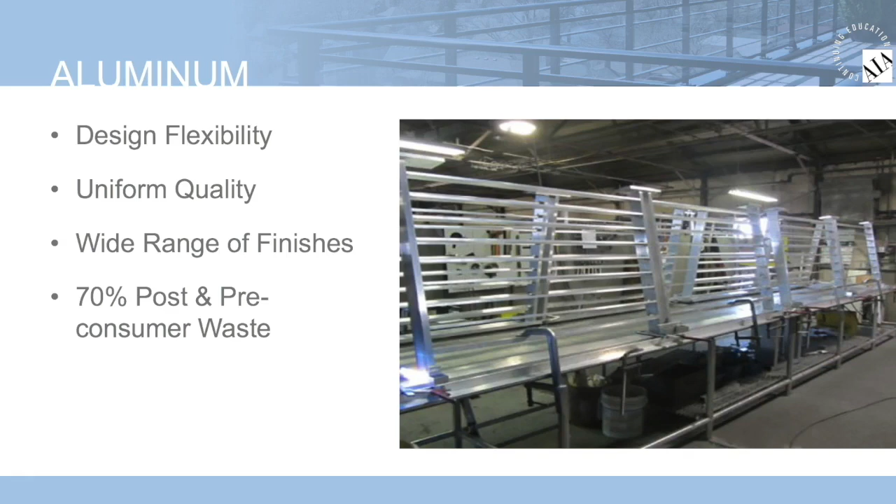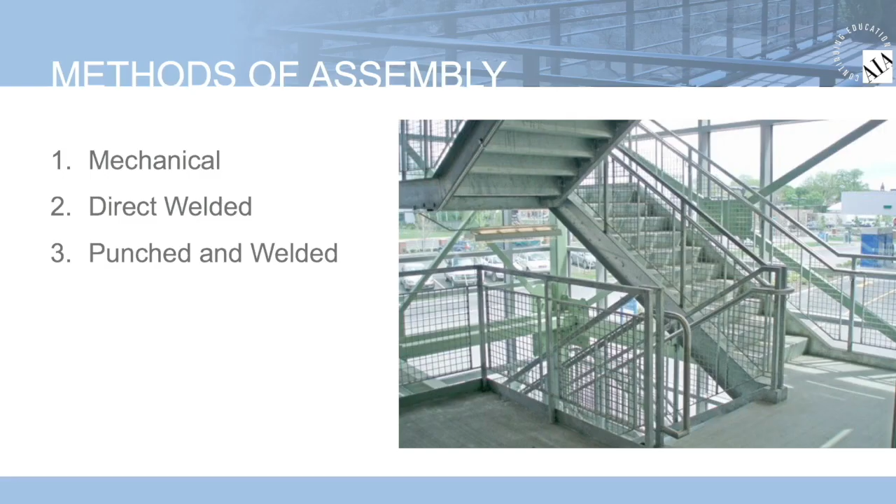There are three basic types of aluminum railing system methods of assembly: mechanical, direct welded, and punch-and welded. Mechanical, as the name implies, is a railing system that is mechanically fastened and held together with screws, rivets, or epoxy. The system may initially seem low cost, but there are many potential issues that can contribute to low quality, product longevity, and total cost.

There is a higher cost of labor due to field fabrication cost. Mechanical fasteners have a tendency to loosen and the railing system can become unsafe over time. The quality of the product is only as good as the mechanic who field fabricated all the parts that were assembled. The system can rattle if not assembled properly. The system is only as strong as each individual post. The safety factor is only as good as the field fabricator explicitly following all installation instructions. Cut ends of components open up the paint surface where filiform corrosion can originate, thus compromising the finish.

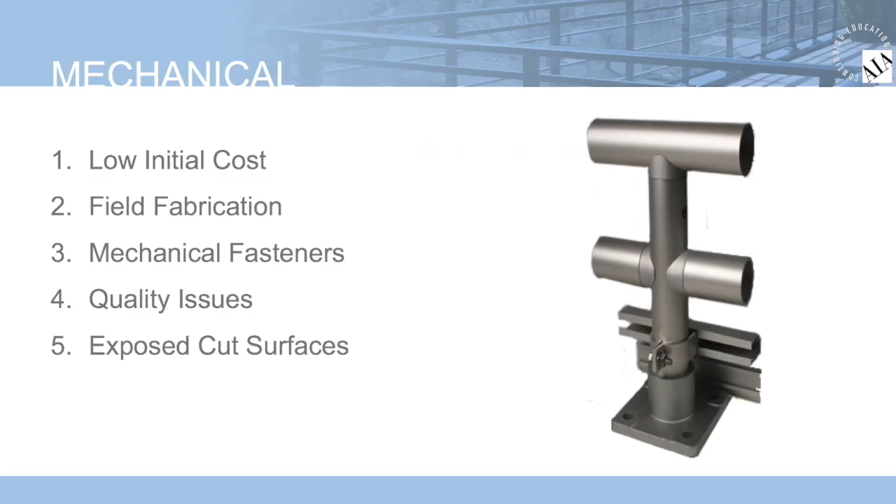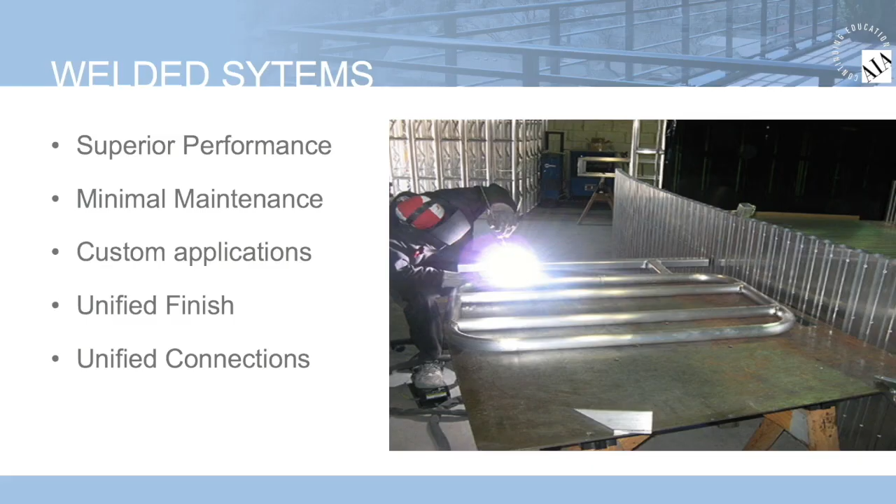In general, welded systems offer superior performance over mechanical systems, providing minimal maintenance and allowing for custom designs with a factory finish and unified construction. Whether it's a direct welded system or punch-and-welded system, there are distinct advantages with direct welding, including lower installation labor cost, typically half the installation time, providing a big cost savings.

Welded systems provide high strength to the overall systems, as all connections are welded, which is much stronger than mechanical connections. The only mechanical fasteners used are to bolt the system to the building and stainless fasteners at all splice locations. The welded unitized system transfers design loads throughout the railing to adjacent post attachments.

Lastly, with welded systems you get the highest level of quality control, as all systems are fabricated in the factory under a controlled environment. There are no exposed ends of aluminum, as all are fully powder coated in the factory.

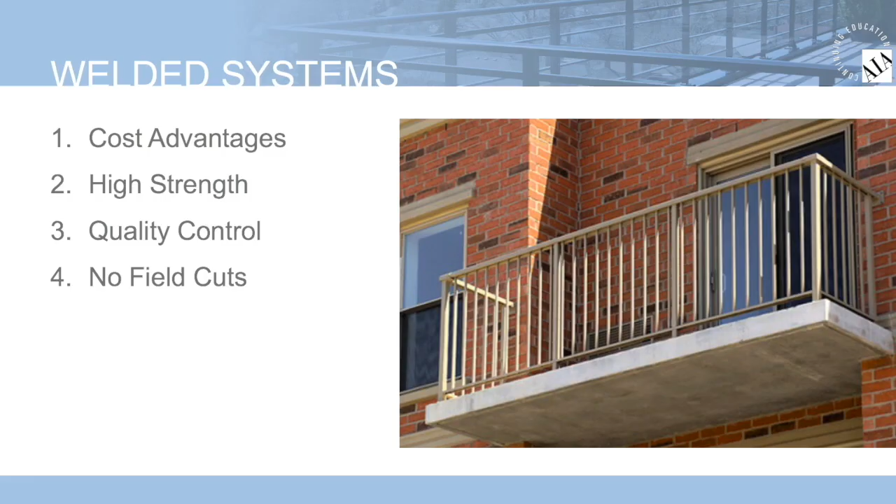Welded railing systems are typically the mark of a premium high-end system. Direct welded systems provide strong, high-strength joints. When fabricated in a controlled environment, it offers superior quality control. Direct welds also allow for highly customized designs with the ability to offer the desired performance of the system.

As railings are a life safety device, it should be noted that welding must meet the proper strength specifications for aluminum structures. This is another area where a reputable manufacturer should be specified for the fabrication of welded railing systems.

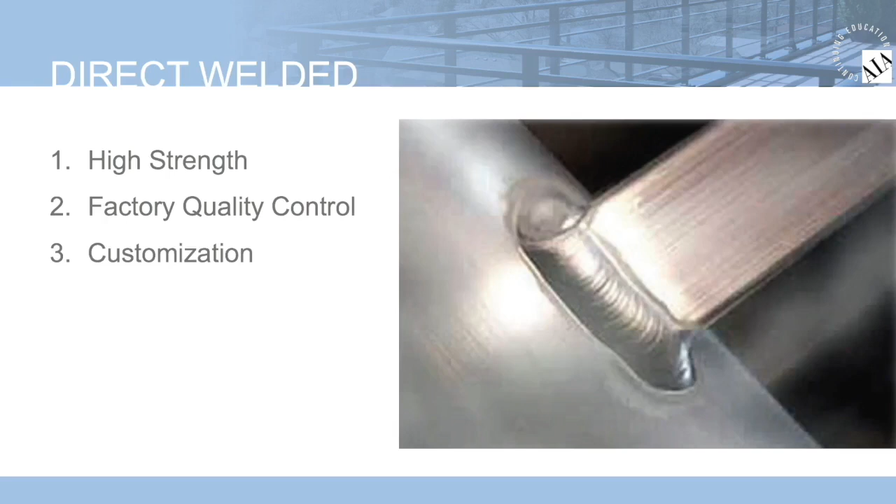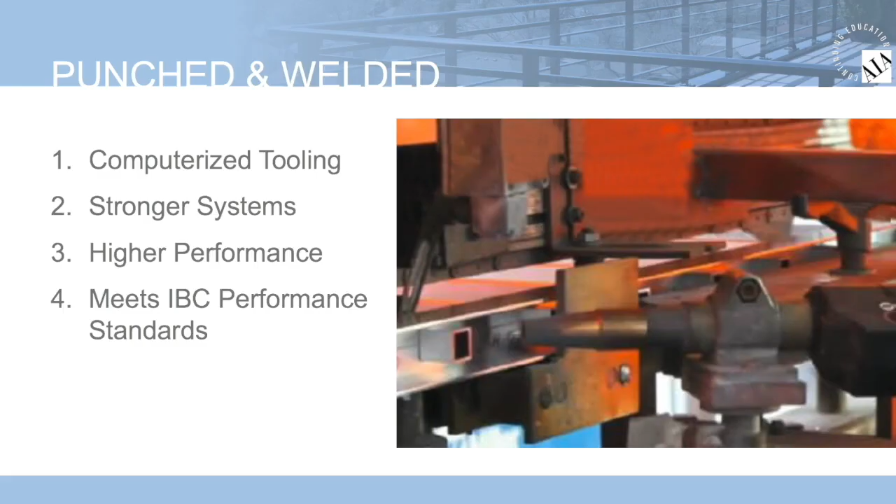The punched and welded systems offer a far greater level of performance than the mechanical or direct welded systems, allowing it to meet or exceed the required IBC concentrated load performance standards.

Exterior architectural railings can be used in various commercial applications, with the design goal to offer safety, performance, and aesthetics. There are a variety of aluminum railing types that an architect and owner can select, depending on the desired aesthetics. The most common types of aluminum railings are picket, glass, metal panels, cables, or custom designs.

The most commonly used railings are picket railings, also referred to as balustrade railings. These traditional railing styles are still the most popular railings in the commercial market and are used worldwide in schools, hotels, condos both high and low rise, apartment buildings, office buildings, and much more. They are also the most cost-effective option.

Picket railings are cost-effective systems that can be designed and customized to meet a specific project need while meeting all of the safety and code requirements.

Glass is one of the most popular railing systems at the moment, particularly for high-rise multifamily and hospitality designs. This presents occupants with a clear view, which is a huge selling feature for the owner or landlord.

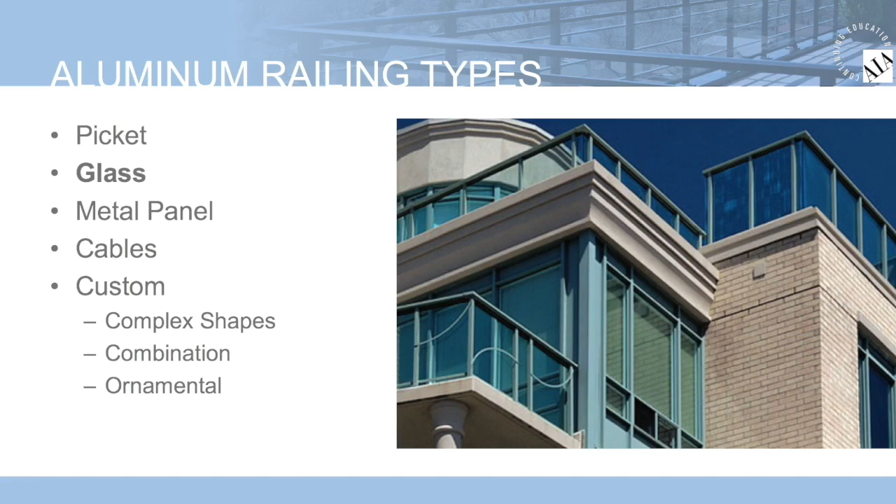Per the 2012 International Building Code, glass used as a handrail assembly or as a guard section shall be constructed of either single fully tempered glass, laminated fully tempered glass, or laminated heat-strengthened glass, depending on the application. This has since changed with the introduction of the new IBC 2015 code, which will be covered later in this presentation.

Glass railings offer architects and owners a modern design, offering various options from clear, tinted, or opaque glass. These glass railings can also provide a wind barrier.

Glass infills should be 5/16 to 7/16 inch thick and must be laminated glass to meet the current 2015 International Building Code for glass used in handrail assemblies or as a guard section.

The popularity of glass railings is driven by its ability to offer the highest level of performance with a clear, unobtrusive view. Various glass makeups and thicknesses can provide the performance needed to meet specific code requirements. Depending on the code requirement, it may dictate the type of glass used in the railing system.

For example, in hurricane regions where there are specific codes for windborne debris, a 9/16 inch laminated glass is typically used. These hurricane systems must be tested and approved before they can be approved for installation.

Code requirements will determine the thickness of the glass. The minimum allowable glass infill option is now 5/16 laminated heat-strengthened glass. There are three basic types of safety glass used today in glass railings: fully tempered glass for those projects designed prior to the 2015 IBC.

Laminated glass with polyvinyl butyral interlayer and laminated glass with ionoplast interlayers each have some unique properties and can be defined as a good, better, best product option.

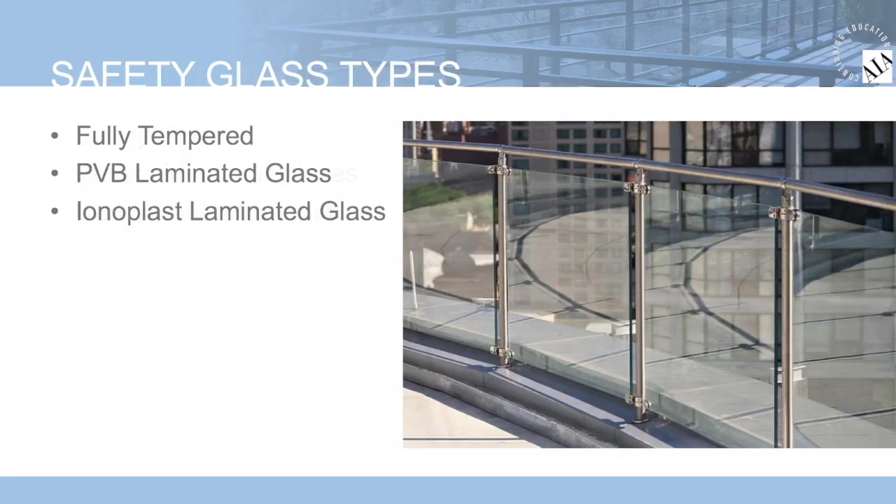Fully tempered glass is 4 times the strength of annealed glass and provides the strength needed for severe wind loads. From a safety standpoint, it is considered safety glass because it breaks into small pieces.

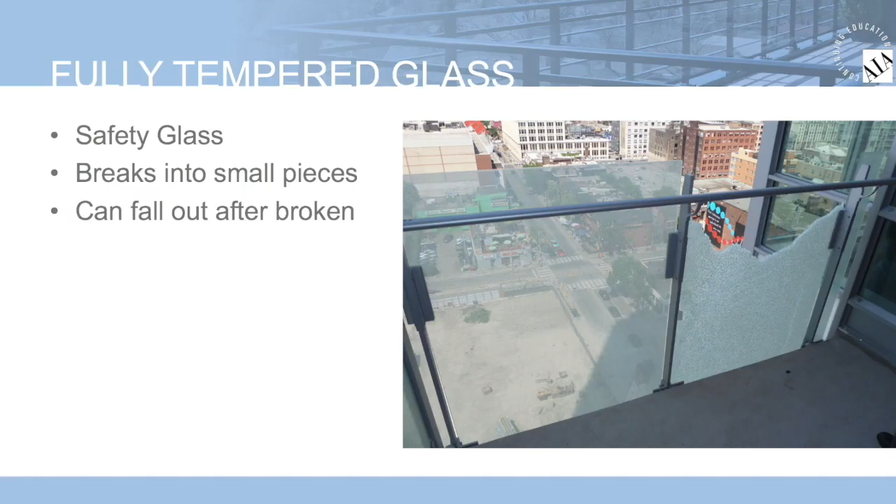The debate with fully tempered glass as an infill for railings is that it may be deemed safe for fall protection, but the infill is completely lost once it's broken and the opening is breached.

Laminated glass with PVB, or polyvinyl butyral, not only meets the safety glazing standards, but it also offers the advantage of staying in place after it's broken. In order to stay in place, laminated glass needs structural support on all 4 sides. If both layers of glass are broken, it can still remain in the frame, minimizing any fallout, creating both safety from falling glass and maintaining itself in the opening.

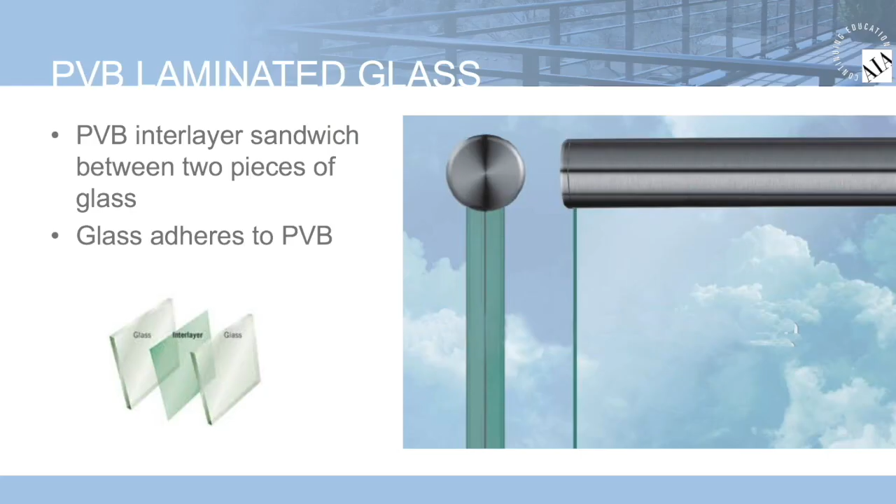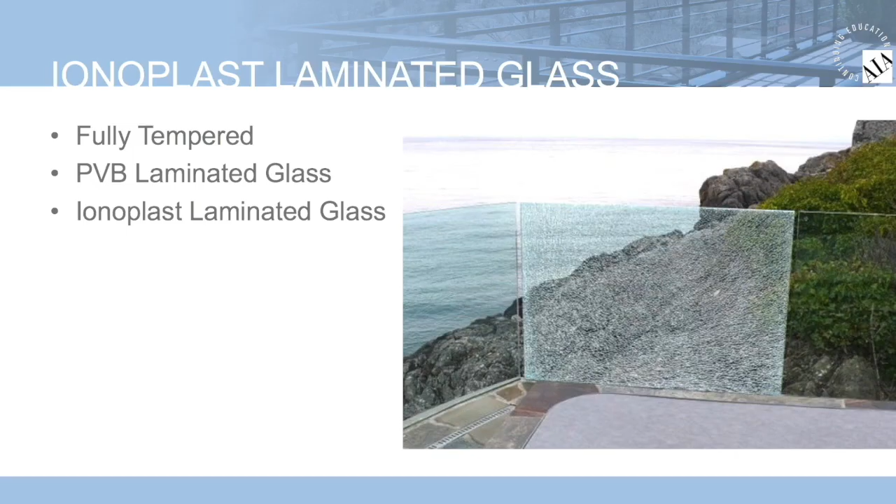Laminated glass with an ionoplast interlayer offers the best advantages of all. It is a much more rigid glass makeup, especially after the glass has been broken. With the ionoplast interlayer, the laminated glass can stay rigid and upright without side or top support.

There can be a pretty large differential in the price of glass railings depending on what type of glass is used and the railing design. As exact pricing can vary by region and manufacturer, you can break it down as a good, better, best scenario with a standard glass railing design, a base shoe structural design, and lastly a point supported glass railing.

The choice of glass will also play a role in the overall pricing of the railing. Tempered glass will be least expensive, if not serving as fallout protection. Laminated glass can be anywhere from 25 to 35% more expensive than tempered, depending on the laminated makeup and interlayer used.

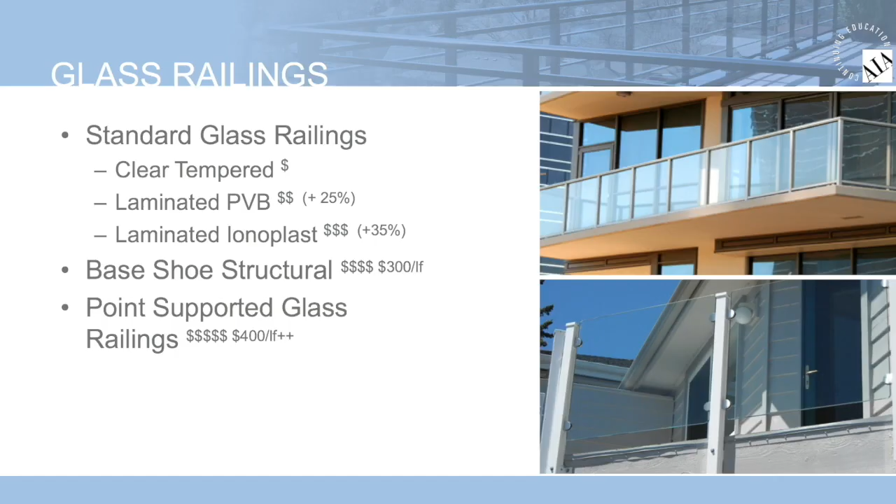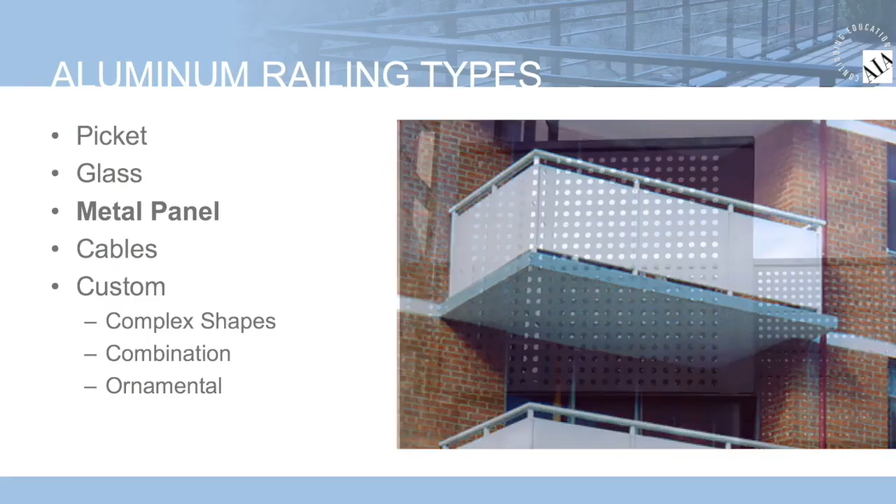Metal panels, although not as contemporary as glass, can offer the architect and owner a cost-effective option, especially when privacy is desired or when the objective is to conceal items behind the railings. Recently, the popularity of metal panels have picked up, with perforated panels providing a stylish option to the metal panels.

Cable railing systems offer the architect and owners a very clean, contemporary look. Cables can run horizontal, vertical, or even a mesh design, offering a unique yet functional railing system. However, keep in mind that some local building codes don't allow horizontal cables due to the climbability issue.

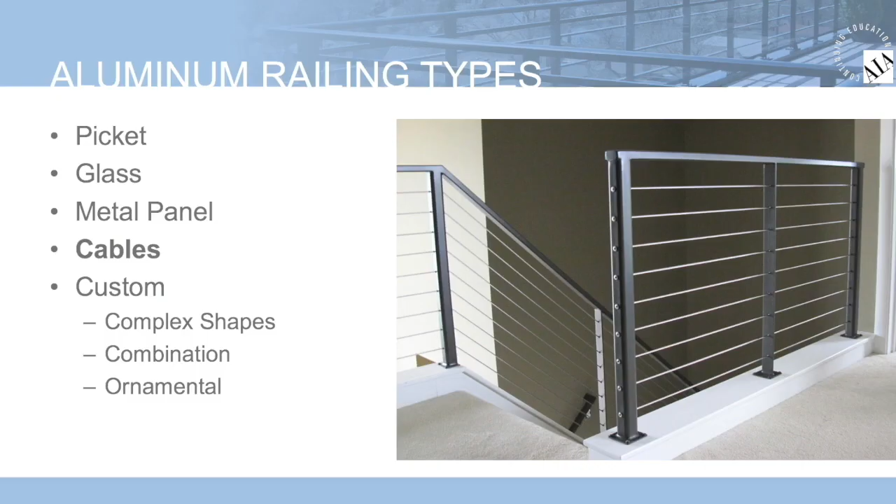Custom railings can be as unique as the designer's imagination, combining the various materials discussed and creating one-of-a-kind railings. Complex shapes can be created with unique infills. The architect will need to work directly with the fabricator on custom railings to ensure that all performance standards are met.

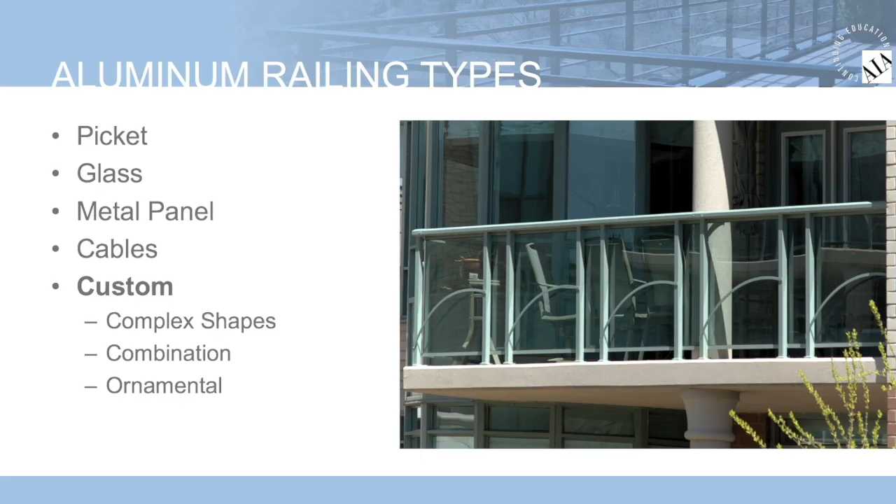This project in Chicago is a great example of creating a custom railing system that not only meets all the performance standards and building codes, but aesthetically it complements and helps define the facade of the building.

From simple railings to highly creative designs, railings can complement or even define the design of a building or home. Most commonly, you will see balcony railings on mid to high-rise multifamily projects. Other railing types include stairs, patios, pools, entrances, and guardrails.

Although the railings can add a significant architectural design to the building, the main intent should always be to provide safety and be in compliance with IBC and local building requirements. Working with an established and forward-thinking railing fabricator who can offer the latest product offerings, technologies, and engineered systems can offer the best product solutions for your project.

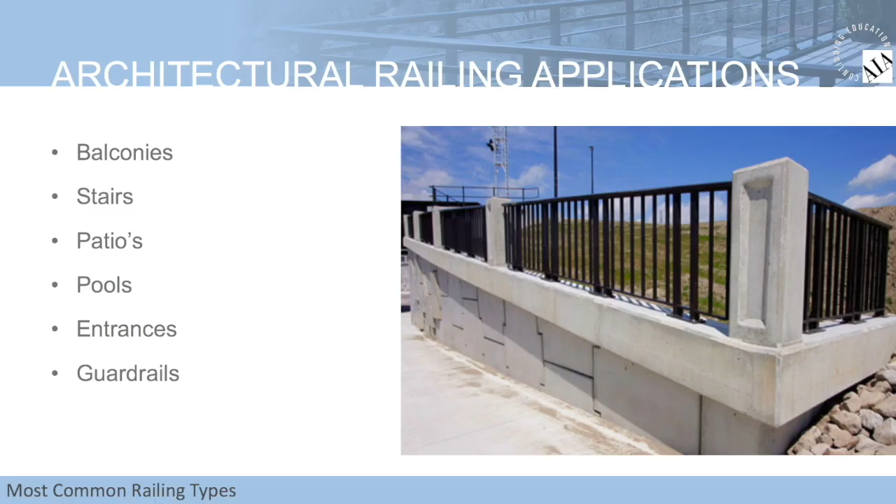Beyond the applications we just discussed, railings can be used in a multitude of ways, be it to secure a space, define an area, provide a safeguard, or add a decorative exterior element to a building or an outdoor space.

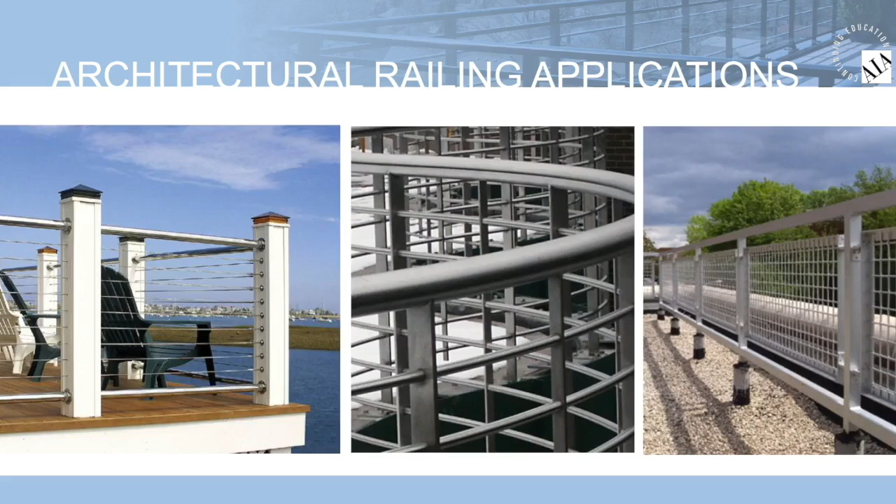Architectural railings can be a critical part of a renovation project, providing a new, updated look or creating a new point of interest, and can be customized to virtually any design style and shape.

In new construction, railings may account for a small portion of the overall budget of the project, but it is typically a major design element both aesthetically and from a performance standpoint. When designing or specifying a railing system for mid and high-rise buildings, there are a number of components that come into play that can impact the design of the railing.

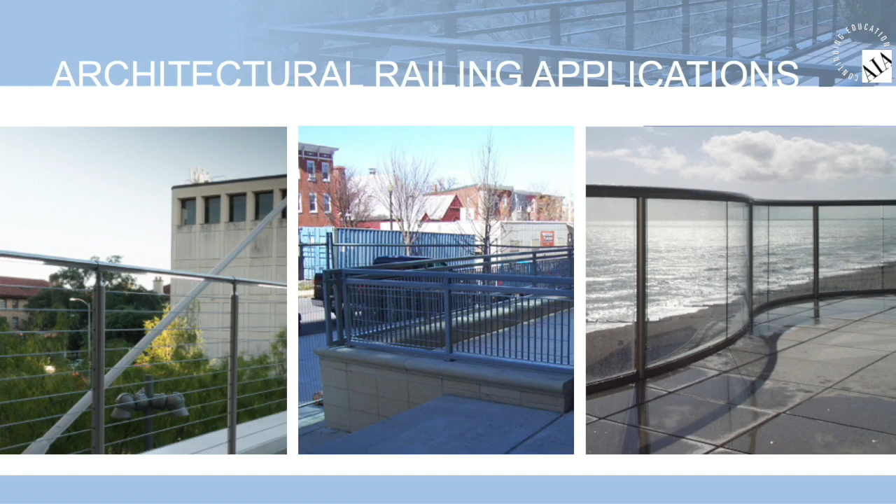Commercial railings offer a multitude of standard and custom components that can dramatically change the look of a commercial railing system. By changing or selecting various components of a system, architects can create unique and one-of-a-kind designs.

In its most simplistic form, there are 4 key components of a typical railing system: the post, top rail, infill, and base plate. Slab covers are an option to conceal the concrete slab.

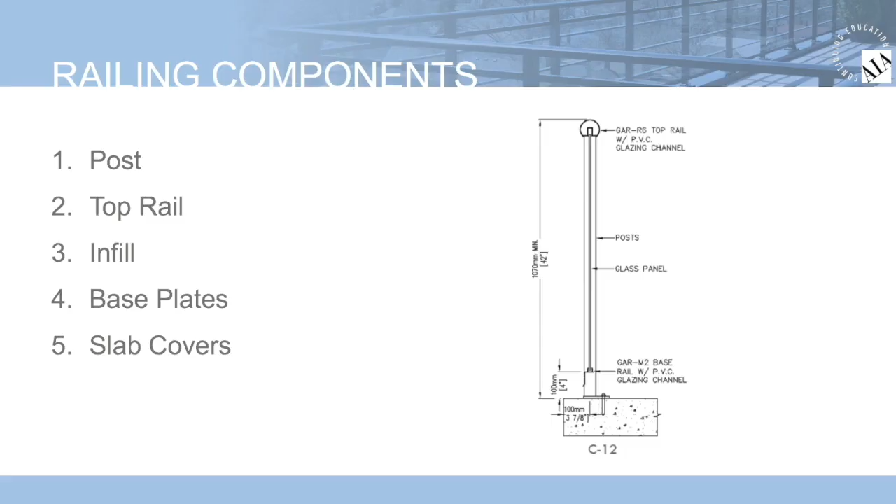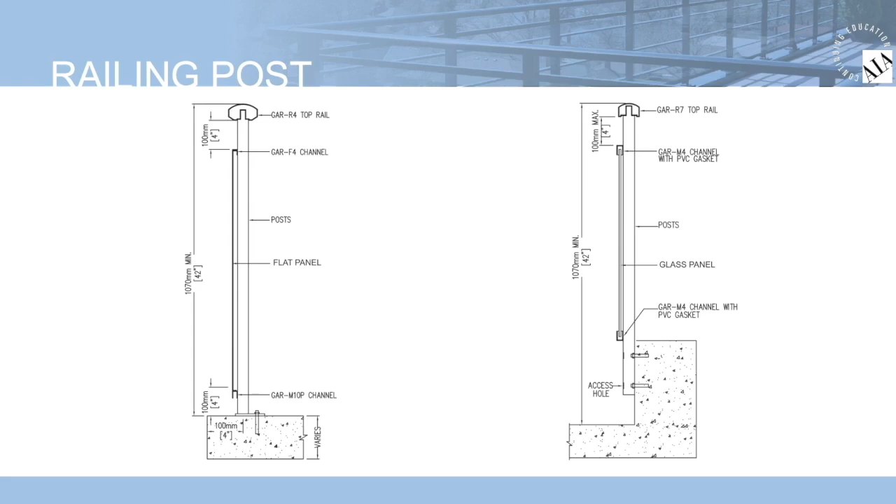The difference in railing systems are how they are put together or fabricated and the materials that are used. Here are 2 railing details. The first system has the standard post, top rail, and base plate with a surface mount. The infill is a flat metal panel. In the second detail, we again have the standard post and top rail, but with this design it has a parapet mount with a glass panel infill.

Spacing of the railing post is critical in both structurally supporting the railing and meeting specific code requirements. Additionally, it is part of the aesthetic design of the system and contributes to the overall look of the facade.

Top rails are typically offered in standard geometric shapes. However, certain railing fabricators offer proprietary shapes and have the ability to offer custom designs. Although top rails may seem like a minor design detail, it can actually help define the overall design of the railing system, and the top rail is just as important to the structural design of the system as the post and base plate connection.

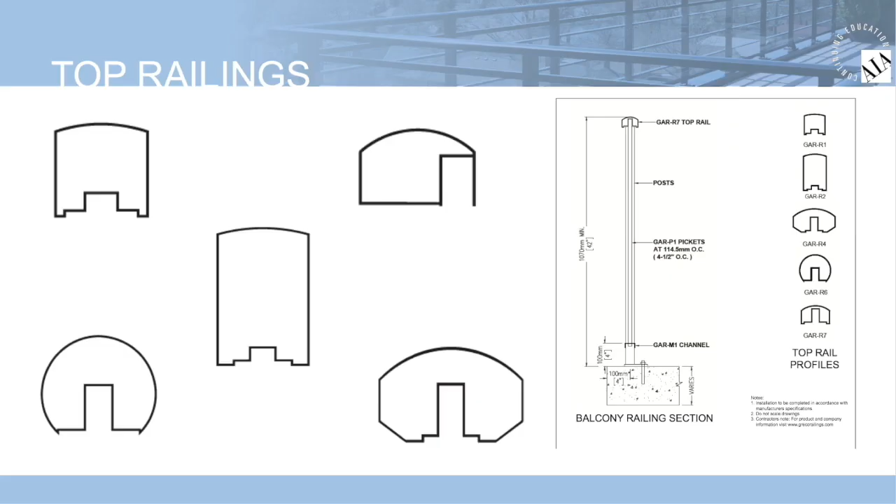Railings have come a long way since the 1950s, when most balcony railings were just simple painted wrought iron in a vertical configuration. While the traditional vertical picket is by far the most popular option, railings designed with infills offer a variety of design options.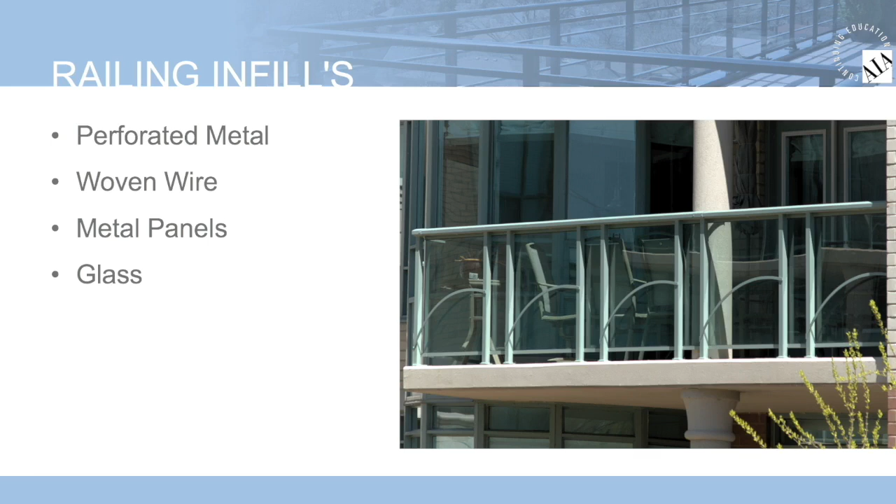Some of these infill options include perforated panels, woven wire, solid metal, and glass, which we've discussed. Unique railings can be created by the combination of the different materials. Railing infills provide architects and owners the flexibility of creating a variety of railing designs, offering a unique look for each project. Depending on the type of infill, you can create various levels of privacy, or you can completely conceal the contents of the balcony.

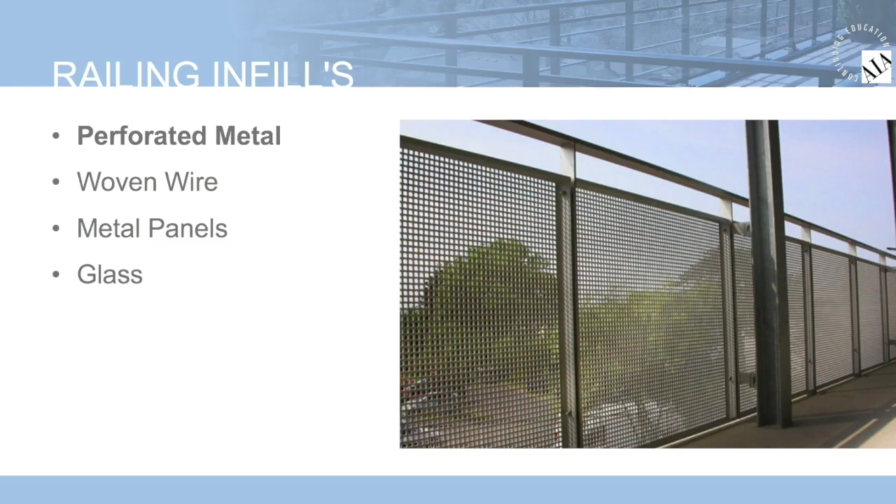Perforated metal infills offer architects a durable and industrial look while meeting the IBC codes. The architect and owner can determine the size and shape of the perforation as well as the finish.

Woven wire or mesh infills have become somewhat popular in reuse or retrofit projects, such as industrial spaces that have been converted to residential or retail space. Typically, a 2-inch mesh will be as small as a fabricator will offer. The largest mesh is typically 4 inches, not allowing the passage of a 4-inch sphere.

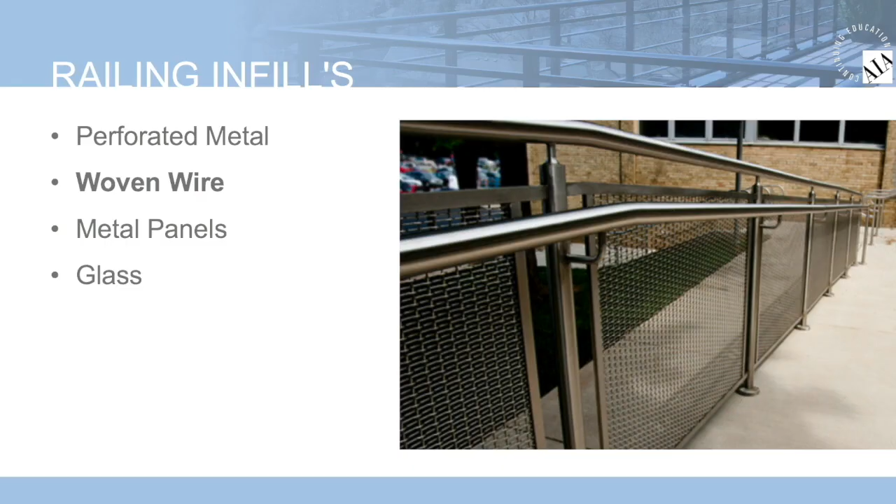We mentioned metal panels earlier. Again, this infill option is typically dictated by price and the ability to conceal contents of the balcony.

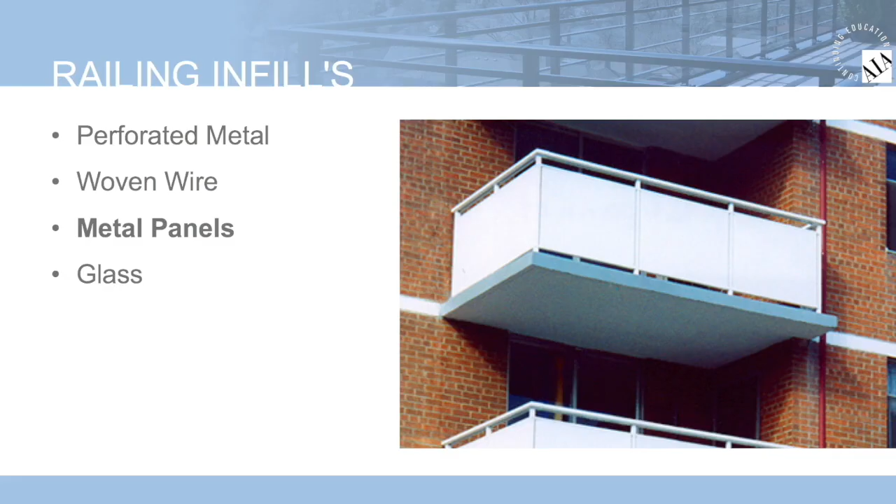We spoke in detail about glass railings. With glass infills, it offers architects and owners a modern design, offering various options from clear to opaque glass. These glass infills can also provide a wind barrier if needed. Glass infills should be a 1/4 inch to 7/16 inch thick and must be laminated glass to meet the current 2015 International Building Code for glass that's used in guardrail applications.

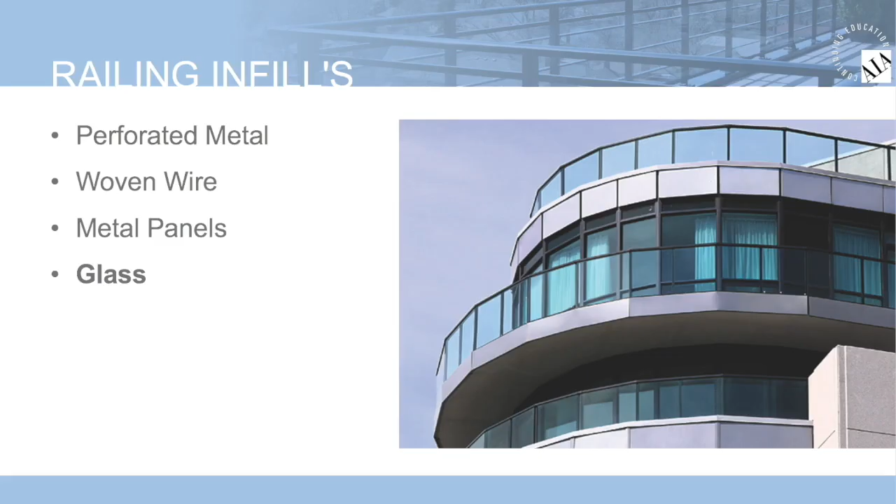Glass infills will offer architects and owners an enormous amount of design flexibility while providing a very contemporary look. By tinting the glass or using colored interlayers in the laminated glass, you can control the opacity of the glass and the level of desired privacy.

The railing base plate is typically dictated by the railing type or design, but can be customized. As the base plate is the structural connection between the railing and the substrate, it is engineered to meet specific performance criteria, as well as project-specific wind loads.

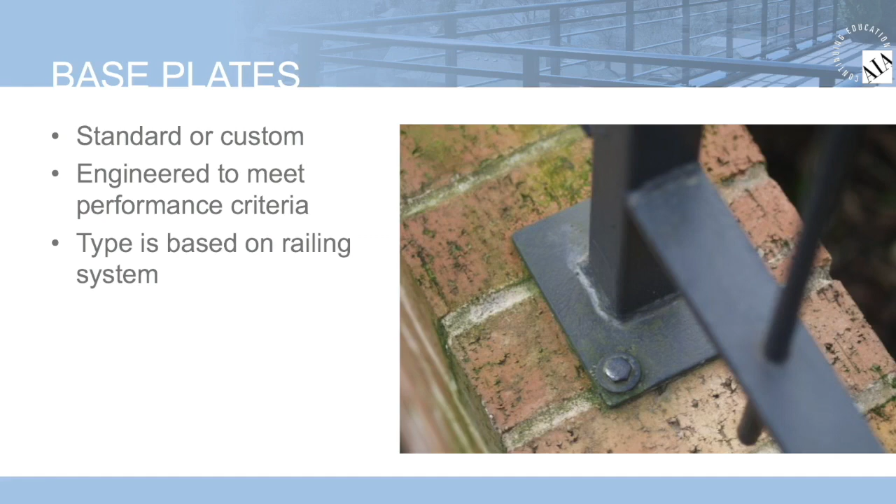Another design feature that can alter the overall appearance of a railing design on the concrete slab is an aluminum slab cover. Slab covers are most commonly used when there is exposed concrete. An aluminum slab cover can be designed to match the railing finish and offer a complete design look, or match other architectural elements of the building.

Our next section will look at how railings are mounted.

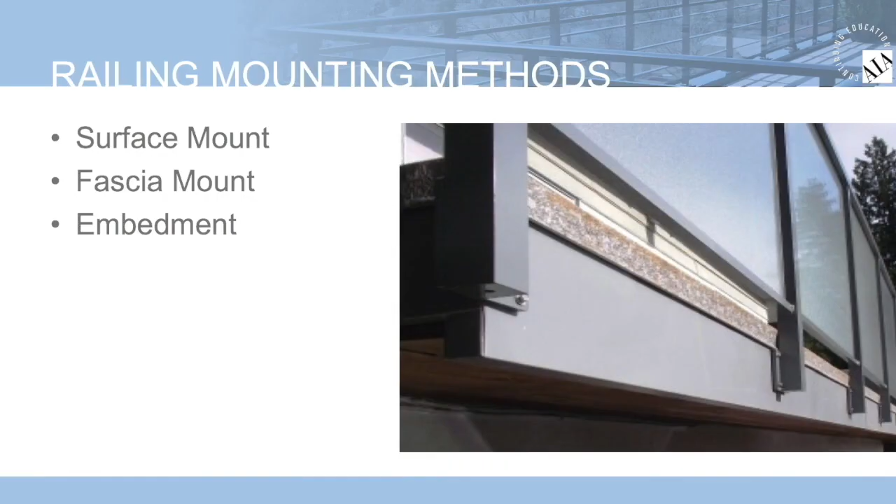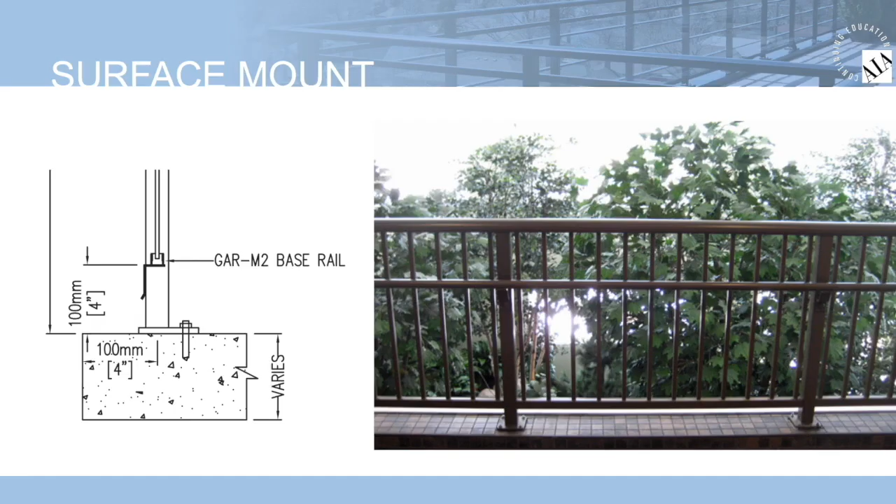There are 3 basic installation methods of mounting a railing system: a fascia mount, a surface mount, and an embedment. Here is an example of a surface-mounted railing, considered one of the easiest installation methods. One of the key installation advantages is that it can be installed while working on the deck. This means the installation crew does not need to work off of a lift from the outside. They can set up the railing system from inside the building and secure it right to the surface. Railings can be mounted to practically any surface, typically concrete.

Next, we have fascia mounted installation, which has become more popular in recent years.

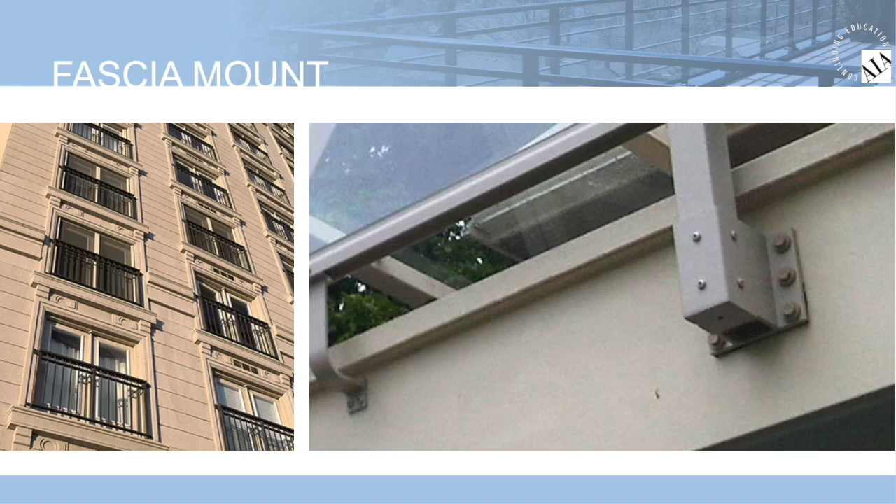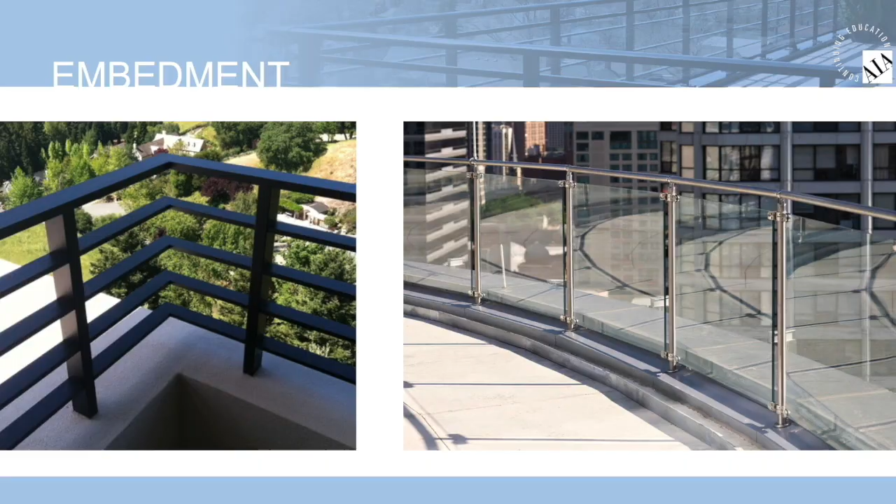It's best to work with a qualified railing manufacturer who can help engineer the system with an integrated building design. You should receive product data, CAD drawings, and details of the system from the manufacturer. By working with the right railing manufacturer up front, you can help assure that you address all potential design issues prior to construction. With an embedded installation, the installer will have to use concrete blockouts or core drill the slab. Additionally, you should not use a core mount embed detail in extreme climates that can have significant freeze and thaw cycles.

The finish on aluminum railings is critical in both appearance and performance. In this section, we'll look at the different types of aluminum finishes for railings.

There are 3 types of coatings or finishes for aluminum: anodizing, paint, or powder coating. When specifying aluminum railings, the desired finish and performance should dictate the finish you select.

Anodizing is a simple electrochemical process developed more than 75 years ago that forms a protective coating of aluminum oxide on the surface of the aluminum. The lifetime of the finish is proportional to the thickness of the anodic coating applied. Aluminum oxide is a hard, durable, weather-resistant substance that protects the base metal. The coating may be colored by dyeing or may exhibit bronze tones. The coating is integral to the metal and cannot peel or flake.

Anodizing is most commonly used on mechanical railing systems and seldom on welded assemblies, given that the anodizing would have to be done following the welding operation.

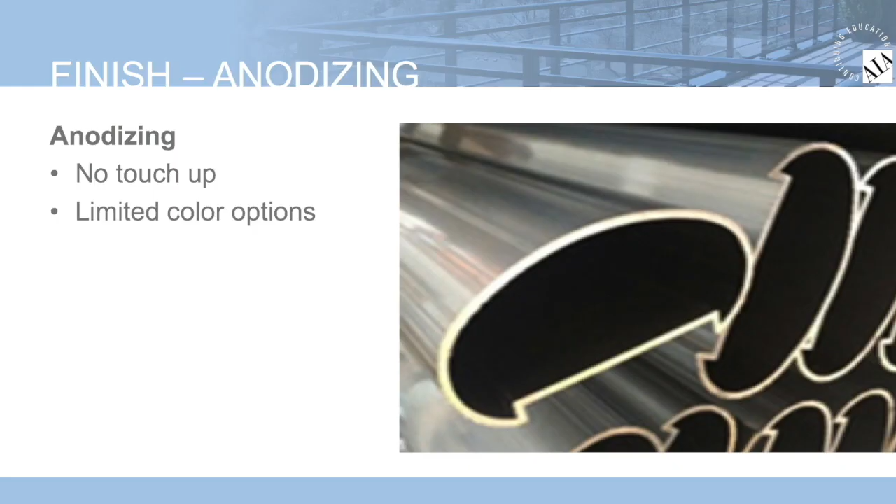Wet paints used as liquid coatings for aluminum railings encompass different types, such as acrylics, fluoropolymers, polyesters, and siliconized polyesters. Each coating contains pigments and resins or binders, which are the primary basis for their classification.

Paint finishes on aluminum must undergo an initial pre-treatment process. If this cleaning is not performed, the paint won't adhere and could later flake off. This pre-treatment varies from a degreasing spray to the spraying of a zinc chromate primer. Next, the paint is applied. These wet painted extruded products are then baked in order to dry and harden the new finish.

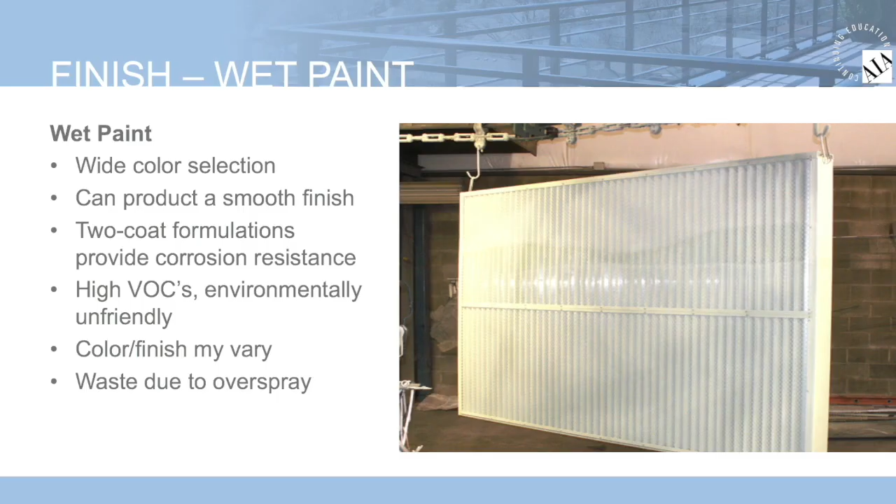Facilities must have VOC emissions control systems due to the high VOCs emitted. Painted aluminum offers a wide selection of colors, can produce a smooth surface, and offers excellent corrosion resistance. The disadvantages include high VOCs, color or finish may vary depending on process, and there can be quite a bit of waste due to overspray.

Powder coating became commercially viable in the 1960s as an alternative to liquid coating, which was considered environmentally damaging. Today, powder coating is used throughout the construction, architectural, and interiors industries. Powder coating is a dry powder that is applied electrostatically to a metal substrate, such as aluminum. Once the base metal has been coated in the powder, it is heated in an oven, which causes the coating to melt. The intense heat transforms the powder element into a slick and continuous layer that adheres to the aluminum.

Powder coating creates an attractive, durable, high-quality finish, which serves to increase the life of the installation. Powder-coated surfaces are more resistant to chipping, scratching, chemicals, fading, and general wear and tear than other finishes. It is highly recommended to use a certified applicator for powder coating, providing the highest quality control. Powder coating produces no VOCs while offering a decorative finish with the ability to custom match colors. It offers high durability and meets the AAMA standards for finishes.

Here's an overview of the AAMA specifications for finishes. We have AAMA 2603, 2604, and 2605. These are the industry standards for the performance of paint finishes. Architects and building owners should determine which performance specification is required, along with the paint color.

In order to ensure the paint performance for a given application, one of the three AAMA specifications should be referenced: AAMA 2603, 2604, and 2605. These three specifications apply to progressively stronger levels as indicated by South Florida outdoor exposure and laboratory accelerated testing results.

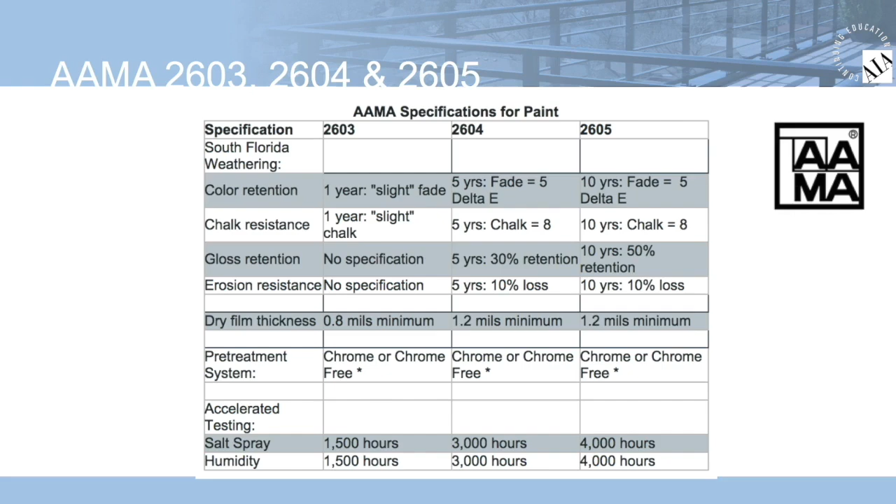The two AAMA specifications that should be considered for aluminum railings are AAMA 2604 and AAMA 2605. AAMA 2604 is the preferred finish for railings according to PPG's internal studies due to the surface hardness of the finish versus those obtained when using the AAMA 2605 powder. AAMA 2604 is an intermediate performance specification, but is the recommended product for use on railings.

A paint meeting this specification would be a 50% fluoropolymer. An application for this paint would be storefront, doors, railings, or other high traffic areas. This finish will provide good color and gloss retention. It also provides good hardness and abrasion resistance.

In comparison, AAMA 2605 is a softer finish, making it more likely to scratch over time due to normal use and cleaning. AAMA 2605 is the high performance exterior specification.

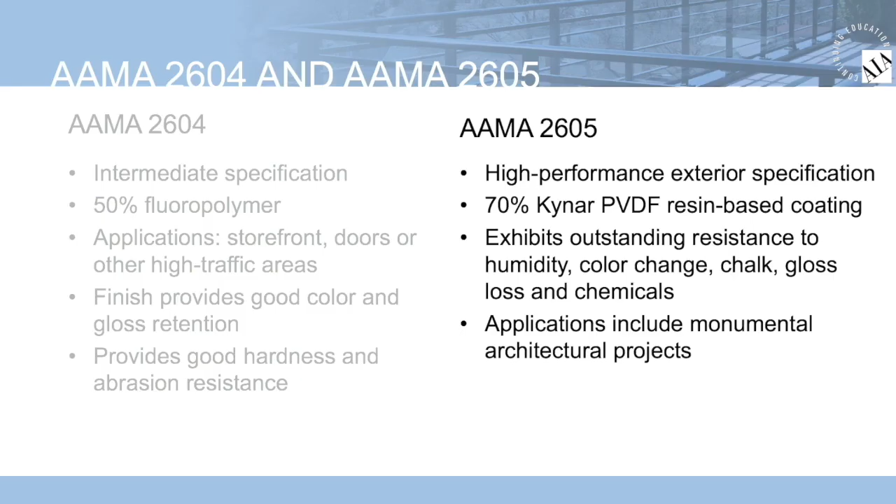A paint meeting this specification would be a 70% Kynar 500 PVDF resin-based coating. These finishes exhibit outstanding resistance to humidity, color change, chalking, gloss loss, and chemicals. An application for this finish would include monumental architectural projects on areas of the building where occupants don't touch or are frequently maintained.

As part of the testing requirements, the powder coat is tested daily for corrosion resistance and coating adhesion according to industry standard specifications. It is also tested in an accelerated weathering environment for several thousand hours to test weathering quality. After 5 years, or 10 for AAMA 2605, of outdoor installation in conditions like southern Florida, the powder-coated product should have almost no color change and exhibit very little chalking.

Periodic cleaning with a mild soap and water will enhance it and help to protect it from harmful agents. Southern Florida is used because the environment there is harder on powder-coated products than other environments, as it has intense sunlight, high humidity, and wind-borne salt spray.

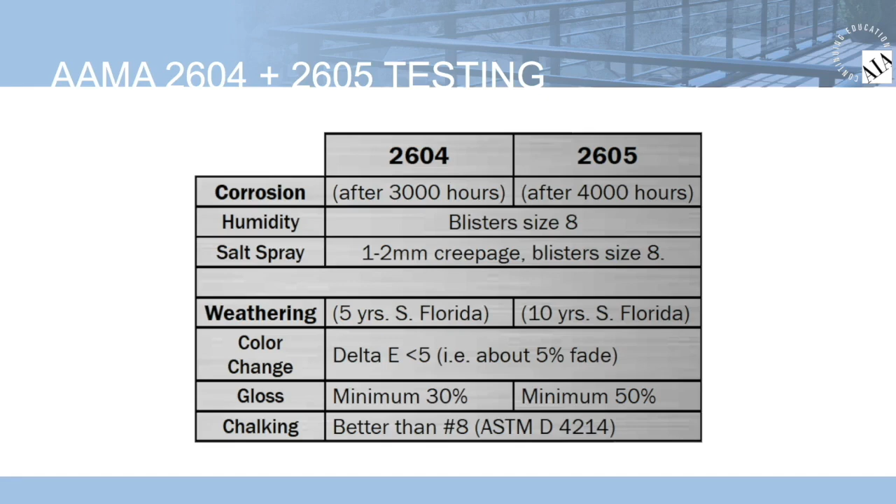Regardless if the coating meets AAMA 2604 or AAMA 2605, the finish is only as good as the pre-treatment. Any quality fabricator should have the following pre-treatment processes in place. First, the aluminum parts should be loaded evenly onto the horizontal hanger that is placed on the conveyor in preparation for a 5-stage pre-treatment wash.

The 5-stage pre-treatment wash should consist of cleaning the aluminum so that it is free of any organic and inorganic contaminants. This system provides superior pre-treatment to the aluminum parts for the powder coating final quality, appearance, and performance. The aluminum must be sent through the drying oven where the moisture from the pre-treatment stage is removed. Parts normally spend 2 to 4 minutes in the oven around 380 to 420 degrees.

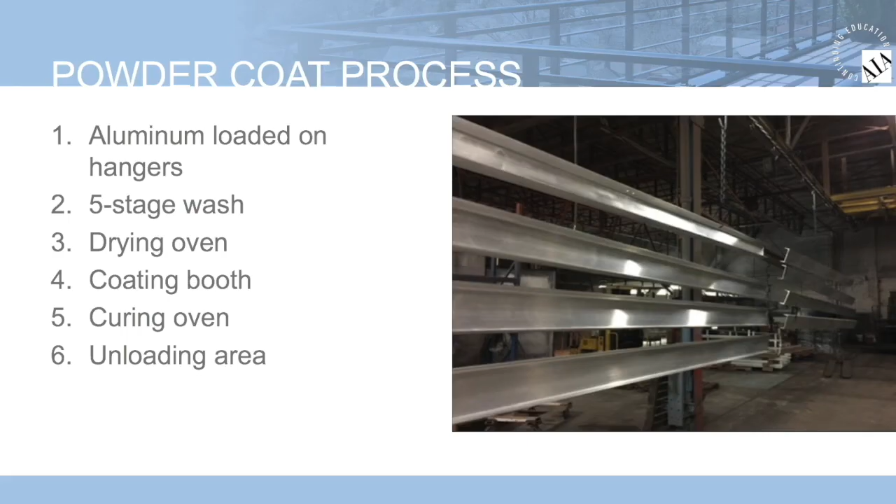The conveyor will move the aluminum through the powder coating booth at a steady rate so that the application guns cover the aluminum properly in order to meet the AAMA 2604 or 2605 standards. The powder should be cured for 8 to 10 minutes at around 330 to 460 degrees depending on the color and the part's density. When the aluminum is cooled, it is then unloaded and packed for shipment and delivery to the customer.

Selecting the right railing fabricator is critical to the success of your project. The fabrication capabilities of a company can define its overall offering and quality of product. Companies that value quality and consistency in their product typically have CNC, which offers a high level of sophistication and consistency to the fabrication process compared to a company who manually assembles their products.

Welded products offer added strength and longevity to the railing system versus non-welded or mechanically fastened systems. In commercial applications, it's critical to have a fabricator that can engineer custom shapes and designs when needed. All fabricators should be committed and in compliance to industry standards.

A fabricator should be able to not only meet design specifications, but should be able to work with the design and provide design recommendations. All reputable railing fabricators should have quality control systems in place and in-house testing. Advanced fabricators will use robotic welding to produce the highest quality at the most affordable pricing. When an architect is evaluating or specifying a railing system, these capabilities should be examined in detail.

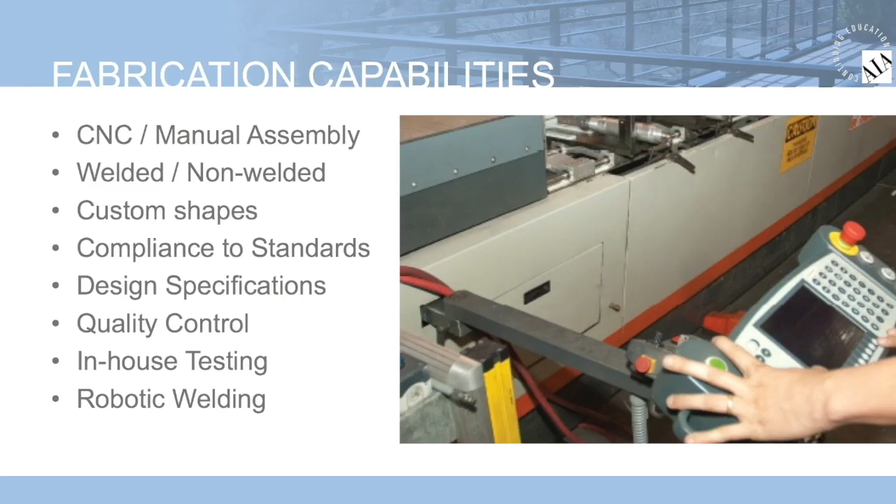A railing system is only as good as its performance and ability to meet or exceed all of the safety code requirements. This is a brief overview of the specific performance and code requirements for commercial glass railing systems. Code requirements are constantly changing, and it's critical that the railing manufacturers stay on top of the most current codes and standards that are related to railings.

Specifiers and owners must be careful in selecting a railing manufacturer, as some companies will offer low-cost options that may not meet the current building code requirements. In working with a reputable railing manufacturer, you can be assured that their engineering staff offers only the highest level of quality while meeting the required building codes. In this section, we'll look at the 2015 IBC related to the load requirements for glass railings.

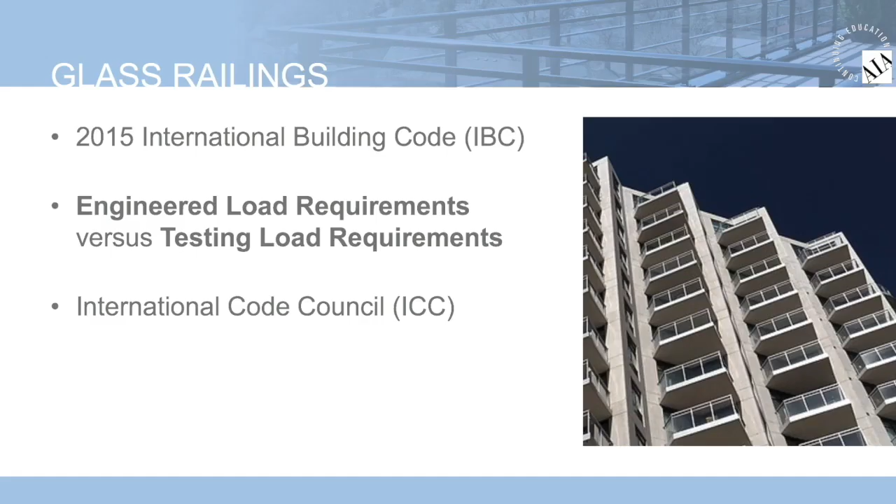The International Building Code, or IBC, is a model building code developed by the International Code Council, or ICC. It has been adopted and used as a base code standard throughout most of the United States. The IBC has long been the governing reference manual for determining minimum load requirements.

The 2015 IBC minimum design load requirements for glass guardrails fall under 4 sections: Handrails and guards, IBC section 1607.8.1; Concentrated load, IBC section 1607.8.1.1; Intermediate rails, IBC section 1607.8.1.2; and Loads, IBC section 2407.1.1. We will take a brief look at each one of these code requirements that are critical to glass railings.

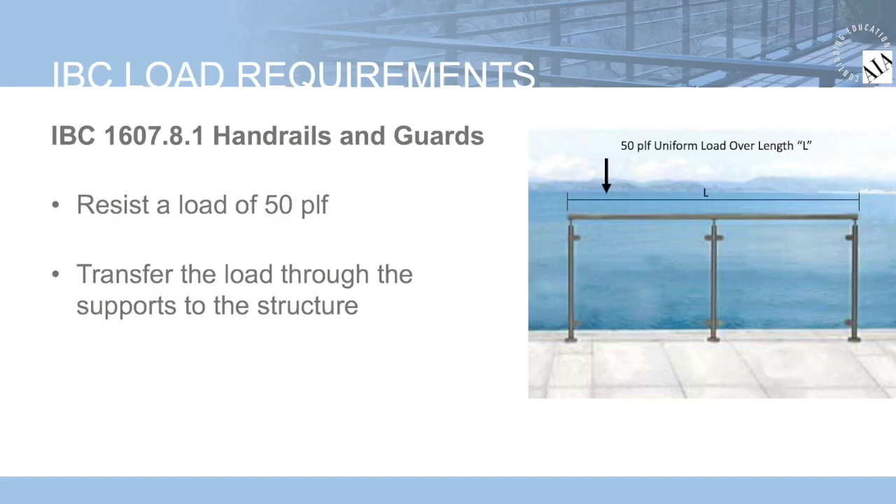Handrails and guards shall be designed to resist a load of 50 pounds per lineal foot applied in any direction at the top, and to transfer this load through the supports to the structure.

Handrails and guards shall be able to resist a single concentrated load of 200 pounds applied in any direction at any point along the top, and to transfer this load through the supports to the structure.

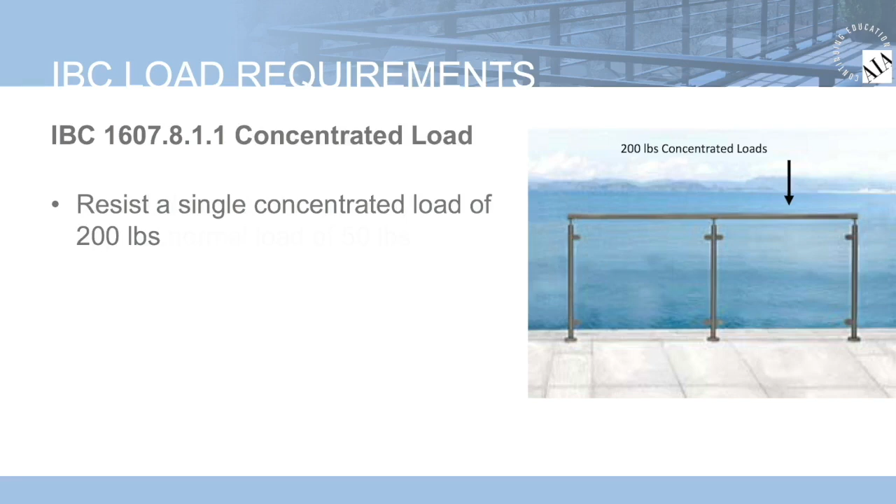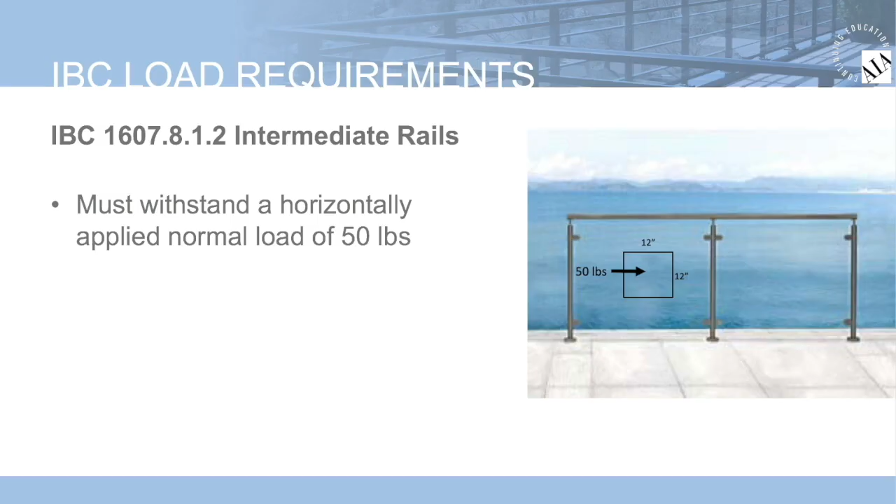Intermediate rails, which would be all those except the handrails, balusters, and panel fillers, shall be designed to withstand a horizontally applied normal load of 50 pounds on an area equal to 1 square foot.

Section 2407.1 on loads states that the railing panels and their support systems shall be designed to withstand the loads specified in section 1607.8. A safety factor of 4 shall be used.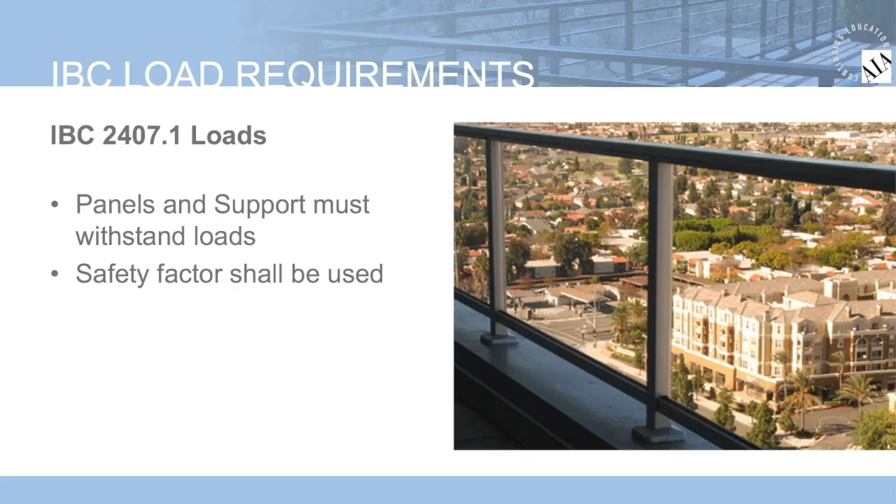It's important to understand that the minimum load requirements provided in the IBC are design loads provided for engineers to be used in the completion of calculation reports.

In order for glass railings to be considered code compliant by testing methods, the glass railing manufacturer must work with an International Code Council approved testing facility, and the testing facility is required to follow the ICC-ES AC 439.

The ICC-ES AC 439 testing procedure uses code-defined minimum loads and deflection requirements along with the appropriate safety factors for the glass and other railing components.

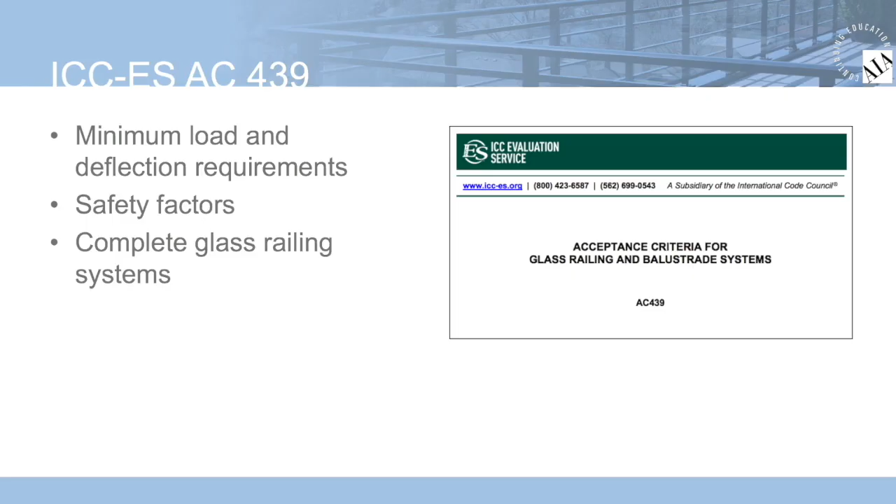These tests are performed on complete glass railing systems and not isolated components such as the base shoe, top rail, handrails, and glass. In addition to the load requirements that we have just discussed, there are other code and performance criteria that the manufacturer must meet and the architect must be aware of.

Guardrails or railings are first and foremost to provide safety and protection. The IBC requires a guardrail to be 42 inches in height. Handrails are located between 34 and 38 inches and have dimensional limitations for graspability.

As such, if a 42-inch guardrail is called for on a stair or ramp, it will also require a secondary handrail at the appropriate height. A guard top rail that is not used as a handrail would not have a graspability size limitation.

Guards also have opening limitations to consider. The most common requirement is that no opening be large enough to allow a 4-inch sphere to pass.

For glass railings, to meet the required safety requirements, the glass must be constructed of either laminated fully tempered glass or laminated heat strengthened glass. Glass infill shall be of an approved safety glazing material that conforms to the provisions in section 2406.1.

For all glazing types, the minimum nominal thickness shall be 1/4 of an inch. Laminated glass shall comply with Category 2 CPSC 16, CFR 1201, or Class A of ANSI Z97.1 listed in Chapter 35.

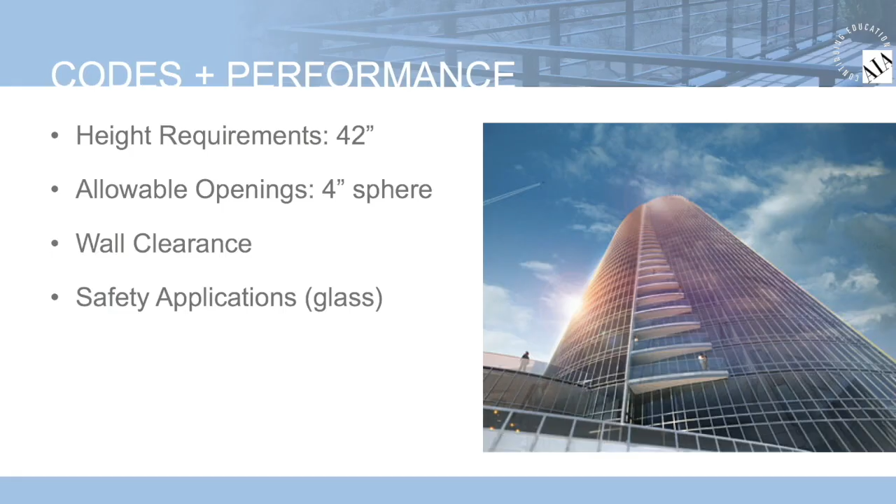Our last section before we look at some case studies is product evaluation and specifications of commercial railing systems. These are some recommendations on the selection and specification process for commercial railings. Doing your due diligence in selecting the right railing system is critical to the project's success.

Working with a reputable railing fabricator with a strong track record is vital to being able to get the support and information needed. Here is a checklist of items that should be considered when starting the design process.

First, determine if you're looking for a custom or standard railing system. If it's a glass railing system, determine what type of glass products or your glass options are. Research the fabricator that you're working with or considering.

Compare fabricators' capabilities. Request product performance data sheets, test reports, and, if appropriate, ask for plant tours.

Mock-ups and/or samples are critical in determining the aesthetics that you're looking to achieve. Case histories of similar projects will help determine if there have been similar projects done with the performance criteria of your project. Request project references.

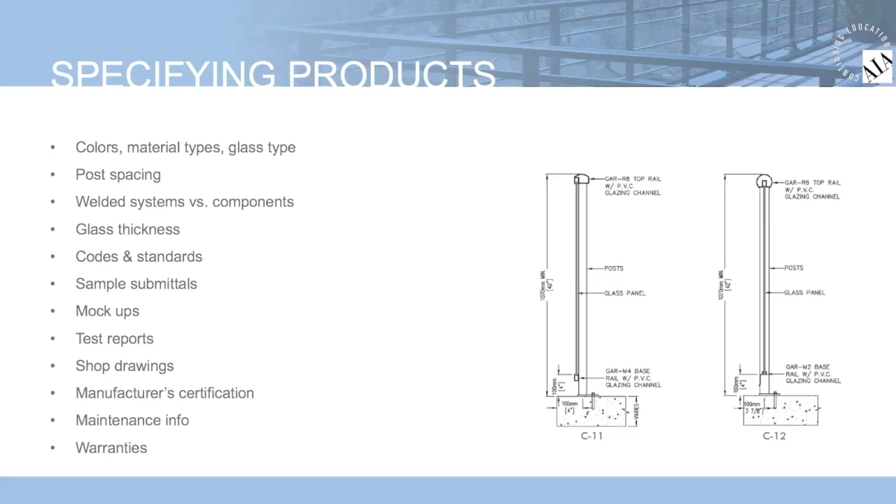Three key areas that should be considered in any product evaluation specification include structure and performance, aesthetics, and execution and delivery. With structure and performance, you should include the following information, documentation, or requirements in your specifications.

Fully welded aluminum only by certified fabricators. Installation means and methods of attachment to the structure. Structural requirements and wind loading. Powder coat, color, and glass options. Project specification engineering. Full-scale mock-ups. Field testing. And paint specifications, either AAMA 2604 or AAMA 2605.

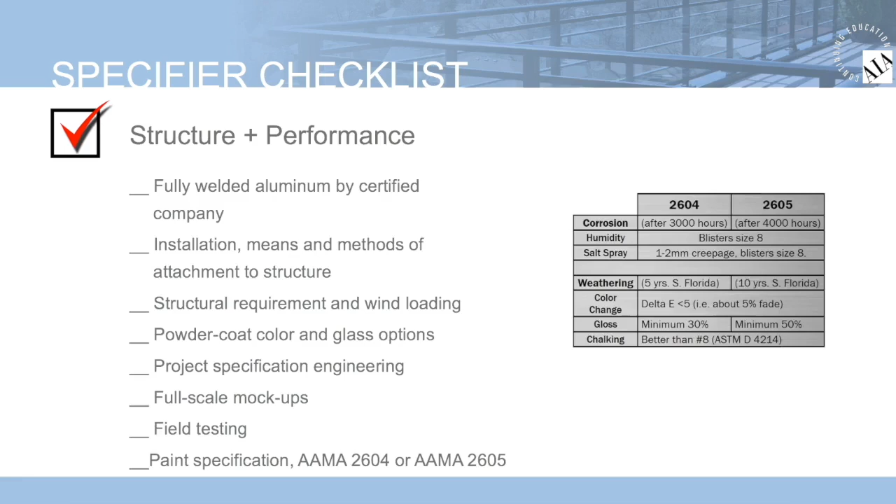For aesthetics, you should include the design of the top rail profiles, the infill design options, whether picket or glass, and if glass, whether it's tempered or laminated, or tinted in color or a frit pattern, and if it's front, center, or back glazed. You should also specify if there will be a slab edge cover for the railings.

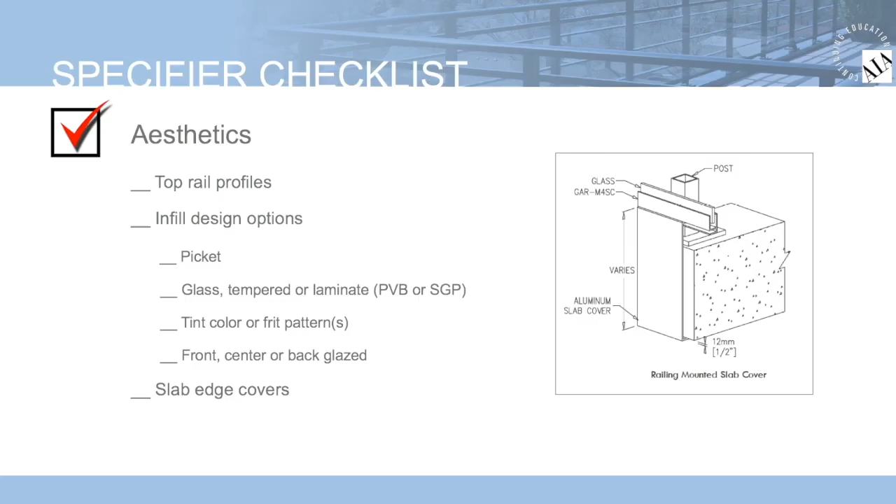For execution and delivery, you should have specified the field measurements needed prior to production, the delivery coordination, the certified installers, a final inspection, and the product warranty.

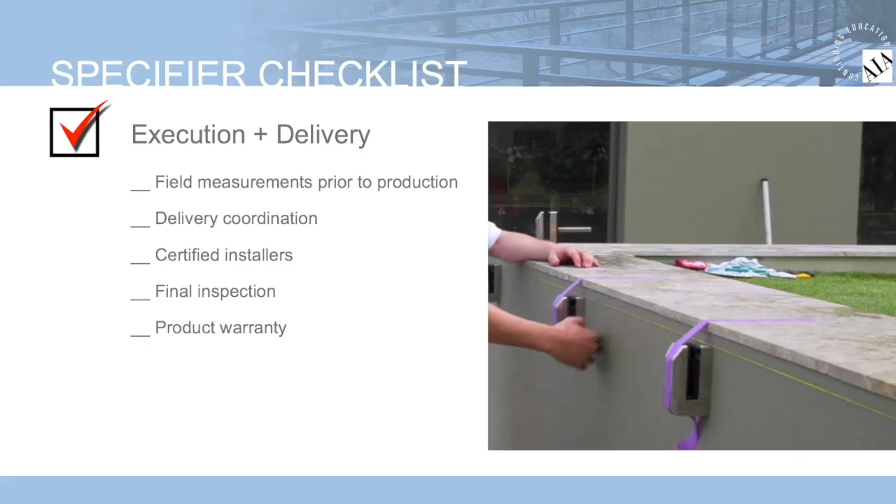As with most major architectural building products that you are specifying, we recommend requesting a CSI 3-part master format spec for the railing systems that you are specifying for your project.

Our last section of this course will highlight recent high-rise projects that have specified and used glass and aluminum railings. The first project is located in Chicago and called New City. New City was designed by OKW Architects and constructed by Power Construction.

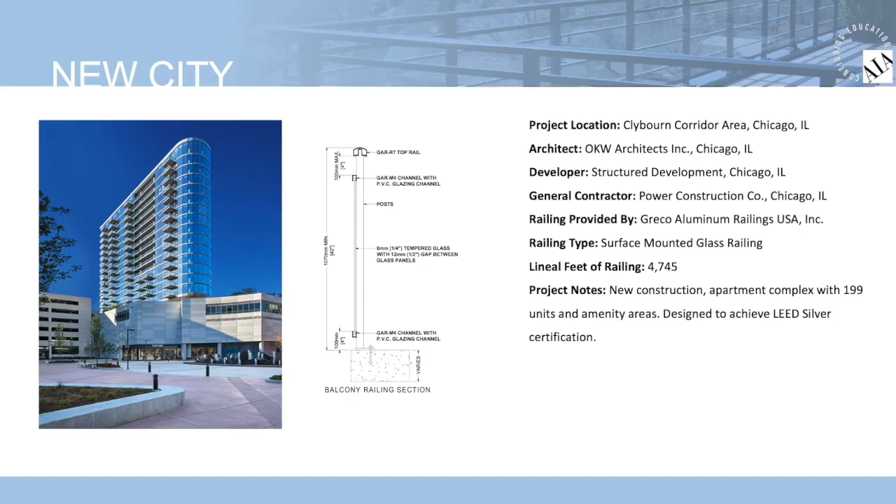4,745 lineal feet of GRECO's surface-mounted glass railing system was specified and used. One of the key advantages of the glass railing system is that it does not obstruct the incredible view from inside the residential units.

Architectural railings continue to evolve and play a major role in many commercial and high-rise residential projects. Architects need to be aware of current and ever-changing railing requirements mandated by building codes. Partnering with an experienced and reputable railing fabricator can pay great dividends on your projects and should be a major resource in engineering and designing the perfect railing system.

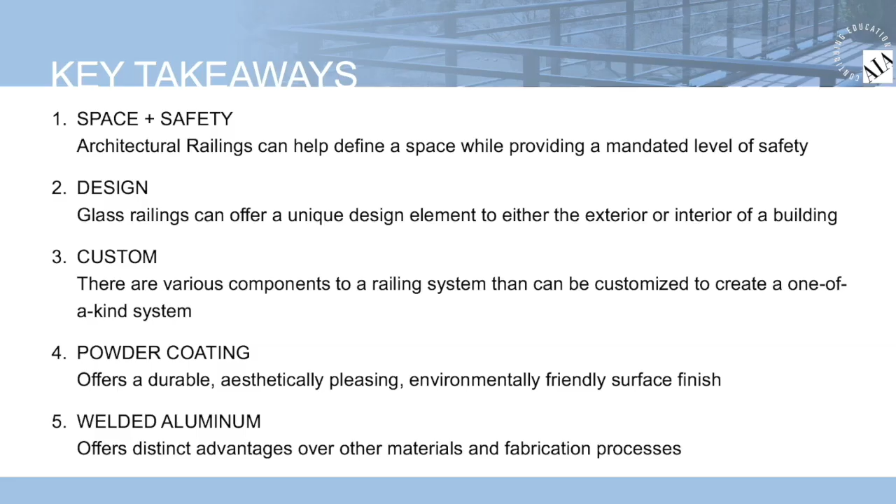Here are some key takeaways from this course. Architectural railings can help define a space while providing a mandated level of safety. Glass railings can offer a unique design element to either the exterior or interior of a building. There are various components to a railing system that can be customized to create a one-of-a-kind system. Powder coating offers a durable, aesthetically pleasing, environmentally friendly surface finish. And welded aluminum offers distinct advantages over other materials and fabrication processes.